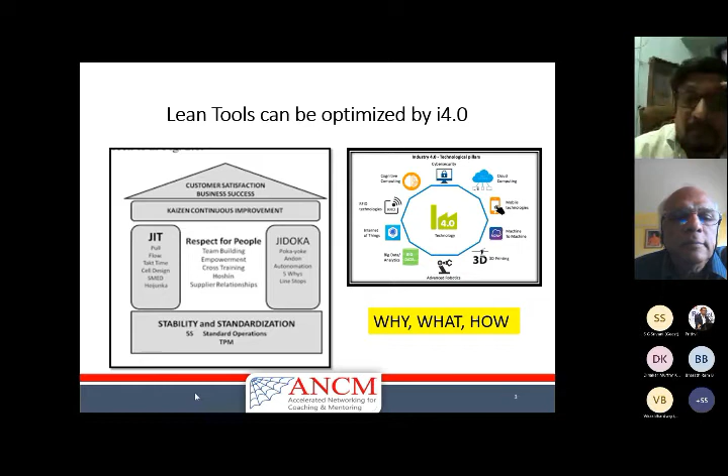Somebody's audio is on. Yes. Rupa, can you send a small request to them? Are you all able to see a screen here? Yes, sir, I think so. Visible, sir. Can you just control that audio of somebody? Their name is SS.

What are the drivers? In 17th, 18th, and 19th centuries, we were migrating from manual, mechanical, electrical to computer-aided manufacturing and automation, and recently internet-driven, data-driven approach. 2 words I'm using consciously: internet-driven, data-driven approach of the 20th, 21st centuries. The primary difference between 3.0 and 4.0 is computer-aided manufacturing, CAM, CAD-CAM, CIM, etc. and robotics and automation existed even during 3.0.

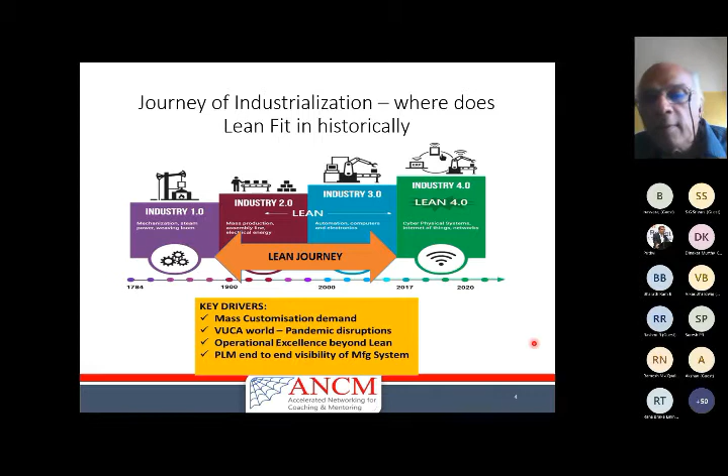Then we all know this volatile, uncertain, complex, ambiguous world. Every speaker on every stage talks about this. But today's talk is how to achieve operational excellence beyond lean. Sir, how is it possible? Some Toyota people are questioning me. Sir, lean is good enough. Just in time is fantastic. Why do we need something beyond lean? We'll come to that point. And with product lifecycle management, PLM, end-to-end visibility is created in the manufacturing system. I know lean also attempts to do that with certain handicaps and difficulties. We'll come to the handicaps of lean.

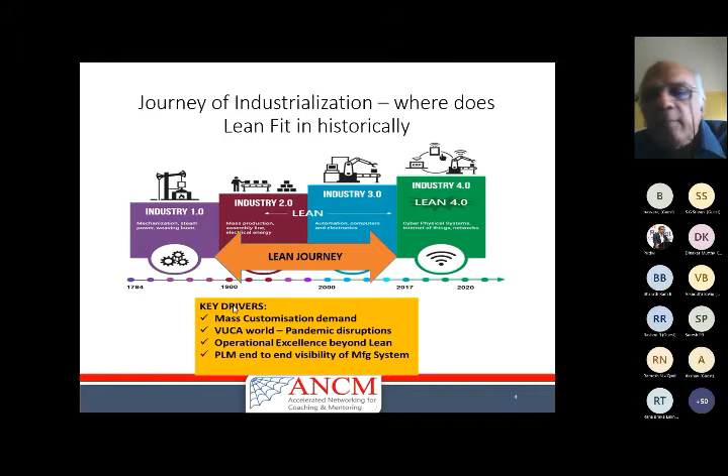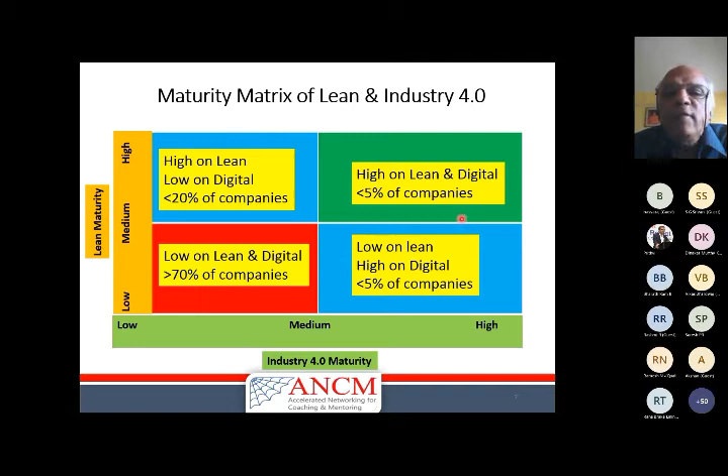Why am I giving all this introduction? To ask you three questions. You all must be wondering what is coming next. Yeah? So far it is a curtain raiser, now it's a teaser. First question. Any of you can type in the text box. Keep typing in the text box. First question: will Industry 4.0 replace lean or will they coexist? I'm not going to give much time, so quickly type it. I'm going to the next question. Question number two: are lean and Industry 4.0 compatible? Do they share any synergies or are they divergent from each other?

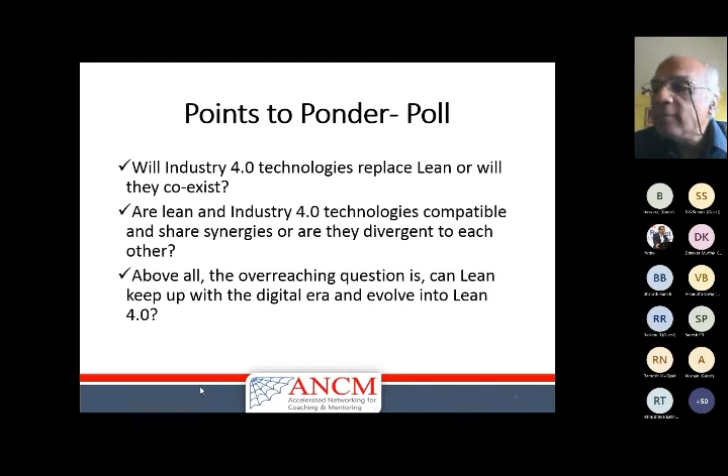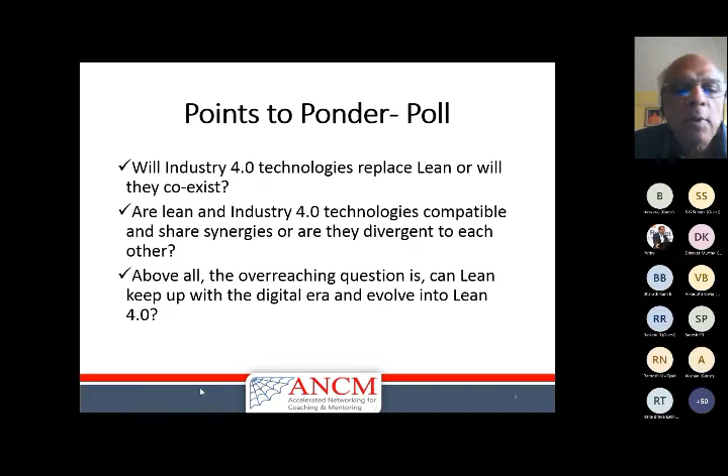Third question. Above all, the overarching question is, can Lean keep up with the digital era? Or is it going to go laid back, and then truly evolve into Lean 4.0? Don't answer it to satisfy me because I am doing the program on Lean 4.0. You be honest and say whatever you feel. Normally, I would have done it as a quiz, but MS Teams does not have a quiz tool.

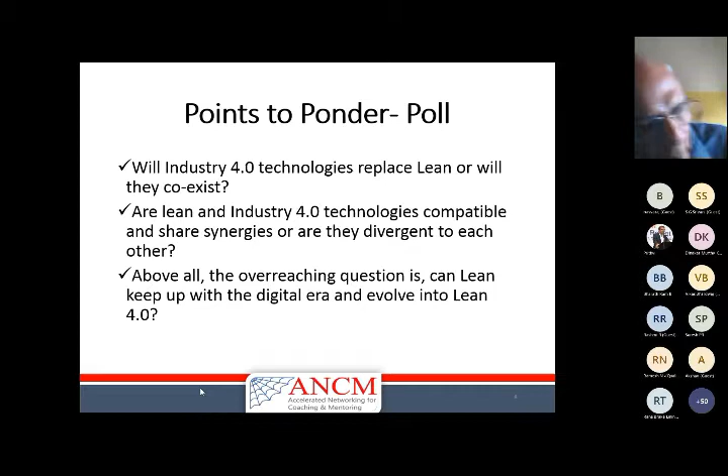Okay, so those are the 3 questions. But I'm going to illustrate to you 3 other questions. One is, how can lean manufacturing, LM, and Industry 4.0, I 4.0, supplement each other at the conceptual level, theoretical concepts. But when you start implementing, can I 4.0 support the lean methods? If it can support, all TPS, VPS, BPS, everybody will be thrilled, because it is going to support the lean methods. And above all, not only support, I 4.0 can help in optimizing the lean methods. The word optimizing is a very, very important jargon. What does it mean? I'll explain in the next slide.

So I'm going to talk about some lean concepts, some Industry 4.0 concepts. You attended several webinars on lean, several webinars on Industry 4.0. I'm only going to give an overview of this because my objective is to combine the two. And then an important point we will touch is limitations of lean. What are the handicaps? What are the shortcomings? How to overcome them through 4.0 and automation. And then we'll arrive at a matrix, the synergy points. The word optimizing, I have not forgotten.

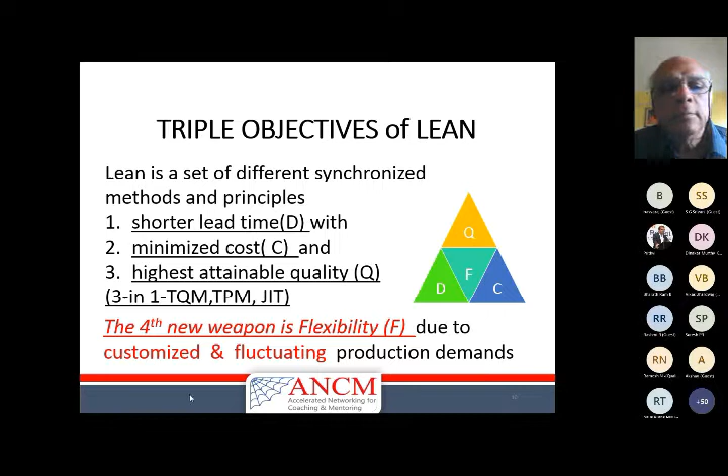And in that context, the capability to manufacture individual and personalized products. When you go to Amazon.com, even the mask which we are wearing, you get hundreds of varieties of mask. Personalized products. The ladies are wearing one mask, one color, matching the saree color. And individual. So how to produce masks? So variant diversity is a very, very important point. Variant diversity.

But Toyota production system looked at two major aspects. Reduce the waste in the value chain. There should be no muda. Muda, mura, muri, of which muda is very important. No waste in the value chain. There can be nothing which is not adding value to the customer.

But maximize customer value through continual improvement. It is not a static picture. Customer value is also a dynamic picture. Today's customer demand, tomorrow customer demand is even higher. Masala dosa, then you want Mysore masala dosa. Then you want Mysore masala dosa made in Dasa Prakash, preferably with a dash of butter on it. So customer demand is also increasing.

So continual improvement is required because customer demand is rising all the time. So customer value focus and elimination of wasteful activity focus. These are the two principles of lean, as you all are aware. And on the other hand, our friend Industry 4.0 is looking at two major aspects. Two. Several people will talk about hundreds of technologies. Just remember two. Human mind can easily remember two.

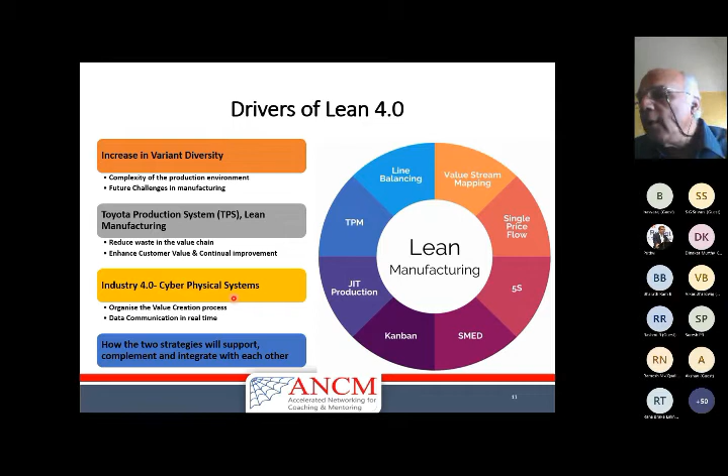Parasunam sir loves KPI, key performance indicator, KRA, key result area. You can measure everything on a real-time basis. When people say real-time, don't get confused. Very simple. Ola car is coming. Where is the car coming? When is it going to arrive? You can watch it through the GPS map every moment. Same with Zomato, Swiggy, Kana.

But in the case of Industry 4.0, it's data communication with a global reach. In real time, global reach. Your supplier can be in Malaysia. Your production can be in Germany. Your final assembly can be in America. You can get this global data communication in real time. Therefore, it can add value to lean manufacturing.

So nobody should say, "Ye sab nahi chahiye, lean is enough." Lean is a foundation. 5S, SMED, Kanban, JIT, TPM, line balancing, value stream mapping, single piece flow. There are many more. It is a foundation. But on that, you need a superstructure called 4.0.

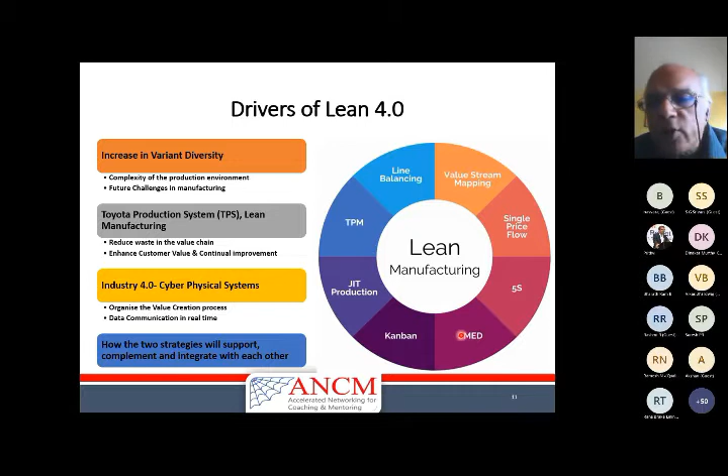Looking in a different manner, already I talked about the JIT and Jidoka pillars, not to repeat, but elimination of any type of waste. Elimination of any type of waste was not possible during lean. While the goal was to reduce the waste, the actual achievement was not possible. One of the brilliant wastes is information waste.

When people say data analytics, data bahut hai, please don't fall prey to that. We don't want data without a purpose. If it is not satisfying quality, delivery, cost and flexibility, forget about data. That is the reason why many startup companies in this country who are digitally very savvy are unable to make a dent in the Indian market, because they are only bringing data analytics and technologies. They are not looking at the benefits of data analytics and technologies, namely quality, delivery, cost and flexibility.

And any type of waste, including information waste: we don't want more data than what is required. Some people say big data, then they scare you. Nothing to worry. Big data has got a very good purpose. I'll come to that point.

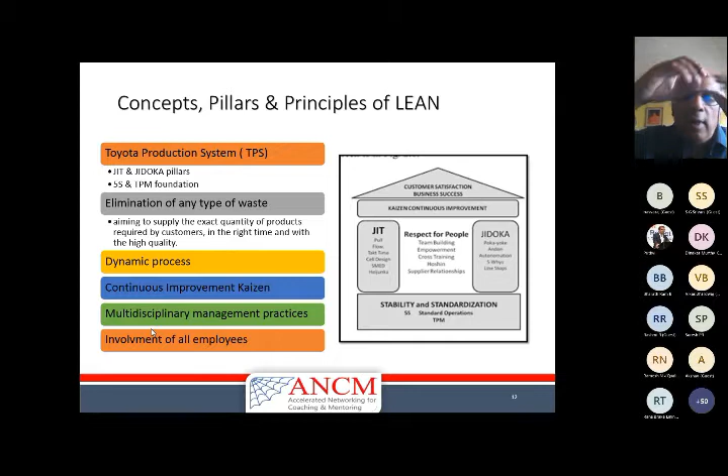So elimination of waste through a dynamic process, continual improvement and multidisciplinary practices. Very important. And involving all employees. These are the common things with both TPS and CPS. Cyber physical systems attempt the same thing, to bring involvement of all the employees. As already mentioned, there is no point in doing digital manufacturing in individual functions or individual levels of the organization. It will not give you the full benefit of Industry 4.0.

A quick summary of the first 7 wastes and how to eliminate them through lean manufacturing techniques. I'm not going to explain all this, you're all very familiar. Cellular manufacturing, setup reduction, SMED concepts, quality control concepts, TPM concepts, production smoothing, Heijunka leveling concepts, Kanban concepts, pull system. Kanban means pull system. WIP reduction, inventory management concepts, supplier development concepts, Jidoka concepts.

Jidoka is alerting the manpower. A very important purpose of Jidoka is alerting the people with information. Computer integrated manufacturing was there even during the lean era. And all of them are attempting to eliminate overproduction, production more than required, transportation, unnecessary movement of products, motion within the workstation, minimize the motion, waiting time, people are waiting, material waiting, product waiting, machine waiting, inventory, unnecessary inventory,

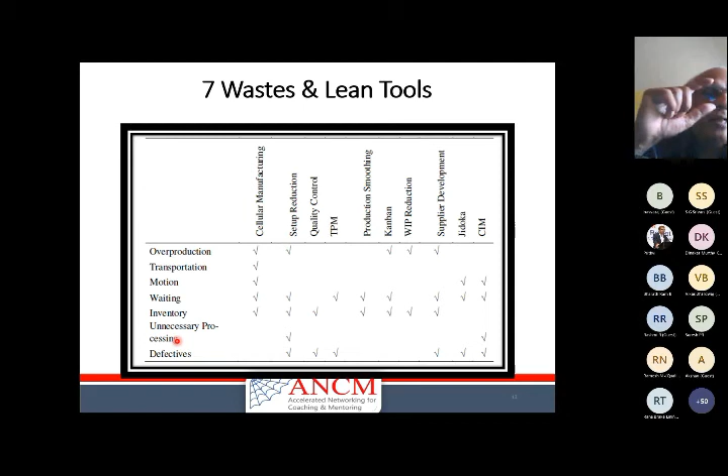stocks are piling up between operations, in the stores, in the warehouse, in the shamiana, in the market, unnecessary processing. People are making calculations of cycle time for 20 seconds, and then it happens to be 30 seconds because there is a 10 seconds additional process. How to eliminate that? Industrial engineers, manufacturing engineers, cutting tool engineers are studying. Defectives, very famous problem, quality problems. All these are eliminated through several technologies. You can see each technology is addressing some of the waste. Cellular manufacturing addressing these, like that.

There's a big thesis on this. If possible, I'll try to share. But 22 years later, again the same thing was analyzed and presented by Womack and Jones.

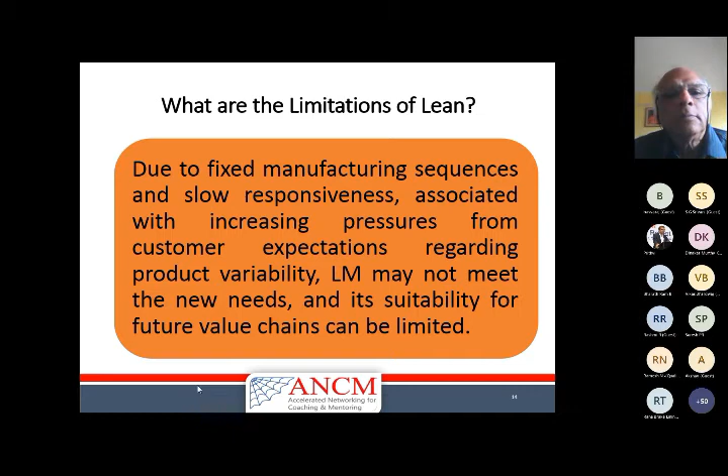What are the various technologies? Having talked about lean, a little glimpse of Industry 4.0. Automated production, predictive maintenance, connected machines, 3D printing, big data analytics, smart transport system, network supply chain, production simulation. Automated production, you are very familiar: automated conveyors, robots, cobots, etc. Predictive maintenance: continuous machine monitoring, condition monitoring, and predicting when it is going to fail much before it fails.

Connected machines. Machines are no more individual machines. All machines can talk to each other, and all machines can be managed through a central agency, not through a SCADA system, but through internet-enabled cloud-based systems. Additive manufacturing is not just a technology, it is also a digitally enabled technology because you can send a program through the internet and manufacture the part anywhere in the world. The design can be in India, production can be even in Africa.

Big data analytics, very useful for machine learning algorithms, ML. When you do artificial intelligence and machine learning algorithms, taking multiple variables, dependent and independent variables, coming from multiple sources, and analyzing them to see a pattern is very, very important. You can't do it with ordinary computers. So you need big data, either server based or in the cloud. And smart transport system.

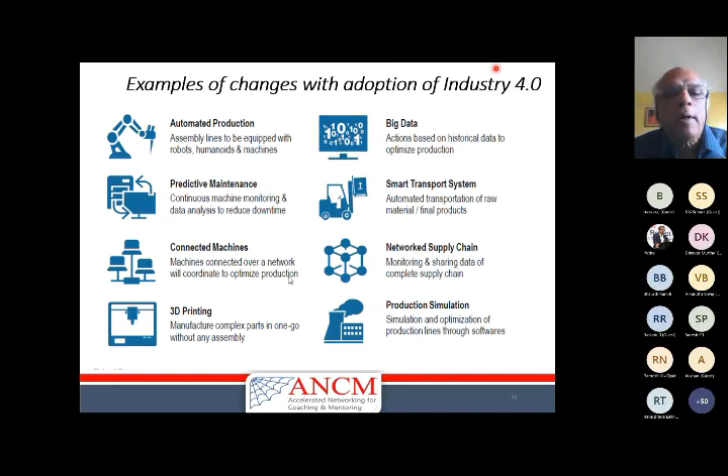And above all, simulation. Without even producing one part, you can simulate every process through PLM technology. These are all put together under the banner of Industry 4.0 and many more. But don't get confused with several technologies and buzzwords. Just remember two things: Internet of Things, cyber physical systems.

The backbone of Industry 4.0, which allows worldwide data communication in real time. 10 milliseconds. My co-chairman Jagannath says 10 milliseconds. The data is coming and you can analyze in 20 milliseconds. Connect several devices to the cloud. Cloud is nothing but internet.

And cyber physical system, it holds a potential to reshape our world with more responsive, precise, reliable, efficient systems through smart devices, sensors, systems, etc. And they are now replacing existing legacy equipment. The other day, I conducted a program on smart machine tools. We will do one day for BCIC.

Smart devices are coming up in smart manufacturing, smart city, smart hospitals, smart hotels, and above all, smart grids for electrical generation distribution. I don't want to get into the depth of the cyber physical system, but suffice to say, the physical world of robotics combined with advanced algorithms like machine learning creates self-learning robots. Is an example. Physical robotics, Industry 3.0, advanced algorithm machine learning, Industry 4.0, together give you self-learning robots.

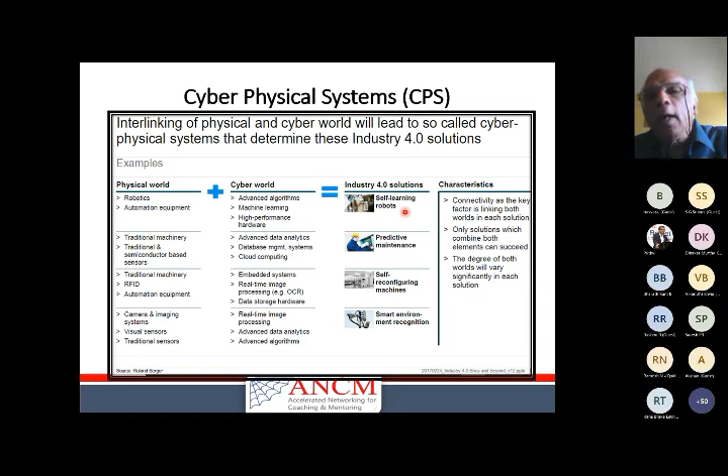You don't need to create a program for the robots. You make an initial program, thereafter it modifies its own program. Self-learning autonomous robots. Self-configuring, self-optimizing machines are not in the future. It is already there in our Ola and Uber concepts. And so, coming to the crux of our presentation today is what are the three levels of integration.

First level of integration is lean is a prerequisite, it's a foundation. Please understand, I love lean. I love JIT. In 1987, I attended a global training program on JIT in Harare, Sheraton. Beautiful hotel. And in the afternoon, we go and see the animals. From that time, in several industries, I had the fortune of implementing JIT. Not only the automobile industry. So it is a foundation and a prerequisite, and it is also the enabler.

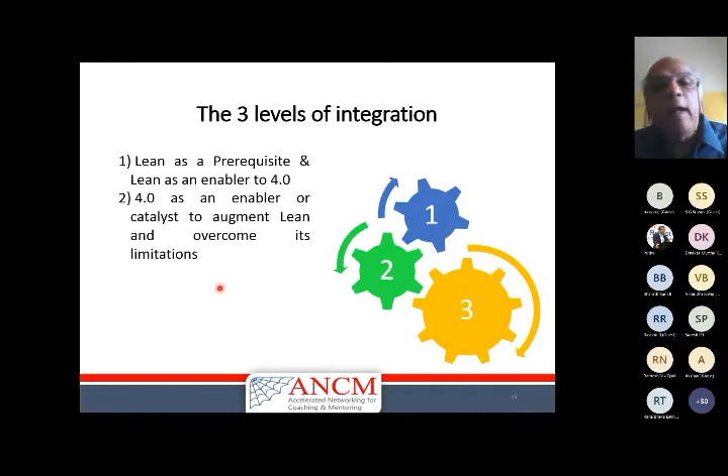How it is an enabler, I'll explain. And similarly, 4.0 is an enabler and a catalyst. If somebody has not done lean so far, no problem. This 4.0 will motivate you to do the lean. But you better do the lean, then do the 4.0.

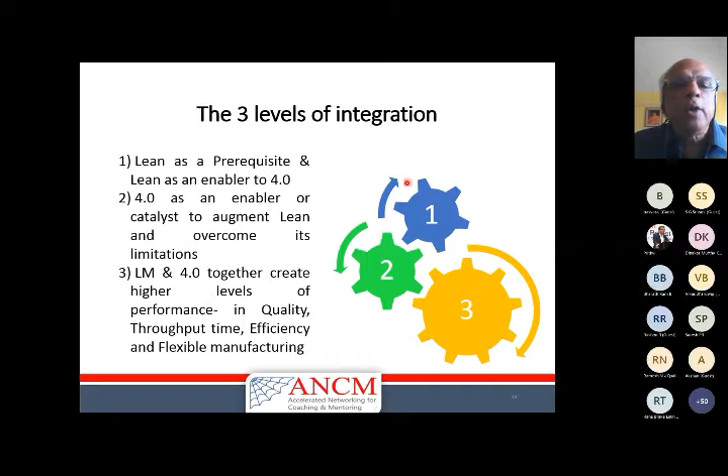And finally, together they create very high levels of quality, throughput time, efficiency, and flexible manufacturing. Throughput time alludes to delivery, efficiency alludes to cost: quality, delivery, cost, flexible manufacturing. All the three gears, 1, 2, 3, together make the integration. Explaining the 3 points. Standardized, transparent, and reproducible processes are the foundation of lean. And that enables you to bring in 4.0.

Our data-driven analytical people would love to have standardized, transparent, and reproducible processes. Data analytics. And the decision makers, the people who understand lean, will automatically understand the value creation and elimination of waste by the 4.0 people. Otherwise, what happens? The 4.0 remain only technology leaders. They will confuse you with concepts like blockchain, artificial intelligence. You think they have arrived from heaven to tell you some technology words. Don't get confused by those people.

Ask them, "To kya hota hai? What is the benefit?" Only the lean people will understand the benefit and the value to the customer, to avoid the waste and enhance the customer value.

And above all, by reducing the product and process complexity, lean enables optimal use, because 4.0 is expensive. If you brought the company to a certain level through lean, you can invest very small amounts and get very high benefit through 4.0. Otherwise, if you start from scratch, your investment in 4.0 is very high.

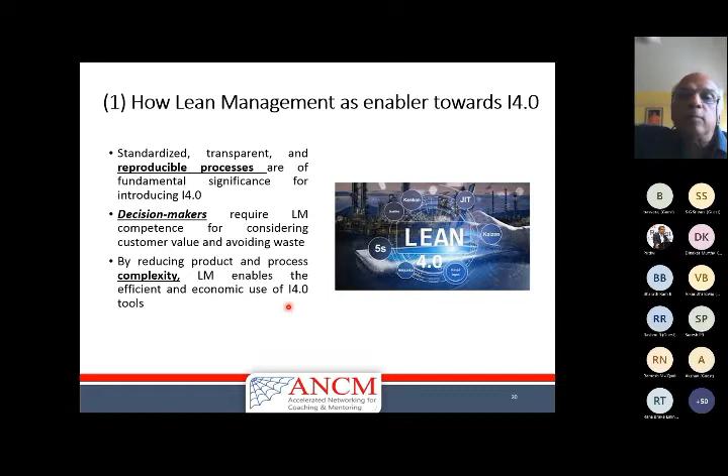And conversely, Industry 4.0 helps you to implement lean. How? A key point is flexibility, flexibility, flexibility. The other day I went to Siemens Kalwa, Mumbai. 150 varieties of switchgear are produced in one line. The line is supplied by Titan Automation, a Tata company, and 150 switchgears are produced.

Earlier method, one line per switchgear. For 50 years they were producing like that, 5 decades. Now one single line produces all the 150 switchgears as per the demand of the customer. And the demand also will vary, it will fluctuate. The takt time of any one switchgear is different from another switchgear.

And they implemented Industry 4.0 with the help of Titan Automation and the Siemens own software division, and they came up with the Siemens Kalwa Digital Factory. I visited that 3 years back. It's a true example of how flexibility and variety is managed in spite of the complexity through cyber physical systems. Every component is carrying an RFID in that factory.

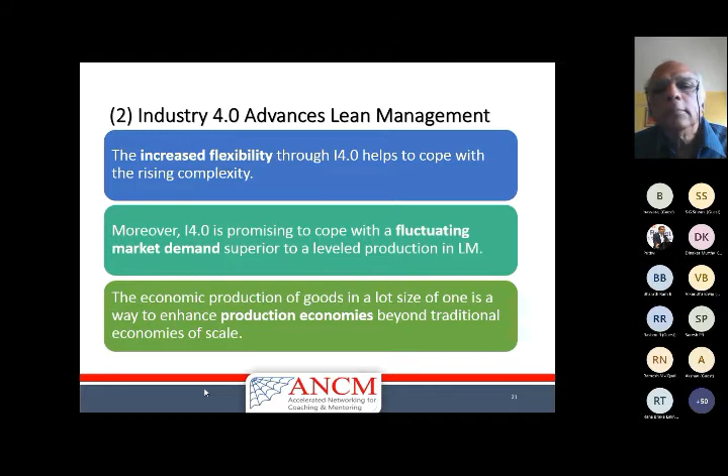I'm not going to explain line by line. That's a master class, it will come later. I'm giving a flavor today. It's already nearing 12 o'clock.

And because of that, whether I'm using automation technology or decentralized production, employee oriented, resource efficiency, and everybody looks at multiple tasks, these are all the main points of lean manufacturing. Even Taiichi Ohno said autonomation. Autonomation is nothing but low cost automation, and automation which will help the operator doing on his own without a supervisor. So to that extent, even 20 years back, there was automation in the lean concept.

But very, very important, which was enhanced by 4.0, is empowering the workers. Like lean empowered through Kaizen philosophy and 5S philosophy, 4.0 is empowered by tablet philosophy. When I say tablet philosophy, I mean everybody has got an iPad or tablet, and you can monitor your own production, your own quality, your own takt time, your own lead time, cycle time, without anybody else telling you from a supervisory level.

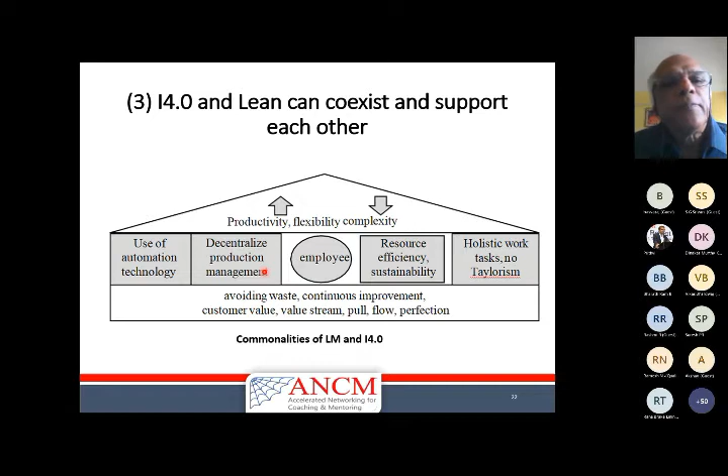So decentralized production management, Monday morning meeting, sunrise meeting, daily work management, all these are replaced. You are going to see this even in the famous companies who are following these things. And then come back to Boston Consulting Group. Those who implemented lean through several concepts could get a 15% cost reduction maximum. The cost reduction also includes cost of quality. But those who implemented 4.0 with no concern for lean could get 5 to 10% cost reduction, mostly through productivity improvement.

But those companies in the Boston Consulting report I showed you earlier, 750 companies who did both lean and Industry 4.0 jointly, got up to 40% cost reduction. 40% cost reduction. They showed it with evidence to Boston Consulting Group through several technologies. I'm not getting into the technologies, but the synergy of both together is much more than any one individual.

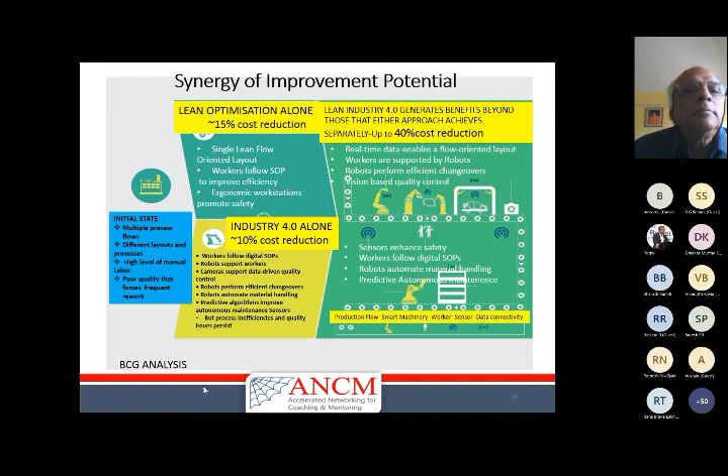That much is my module 1. 12 o'clock now. I finished my module 1, which is nothing but why we should combine the two. So far, we are only looking at why we are combining the two.

I will continue, but any of you who want to go for a health break, coffee break, etc., I can give a 5-minute gap. Rupa, in my watch, we will come back within 5 minutes.

The second module is more important than the first module because the second module is going to talk about how and what to implement in Lean 4.0. I will continue, but if some of you want to go and come back, I have no problem. The deeper analysis is now starting. I can't illustrate all of them.

Just-in-time 4.0, Jidoka 4.0, Kanban 4.0, SMED 4.0, 5S 4.0, Poka-yoke 4.0, VSM 4.0, Value Stream Mapping, Kaizen 4.0, Visual Management, Virtual Simulation 4.0, TPM 4.0. I will attempt to take up one or two of these in the coming slides.

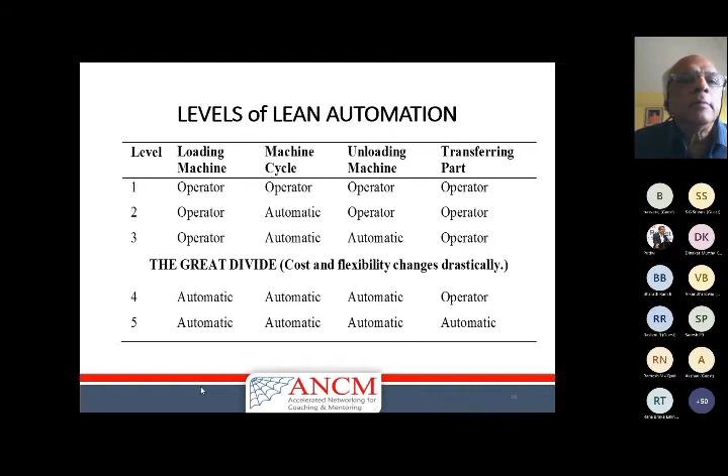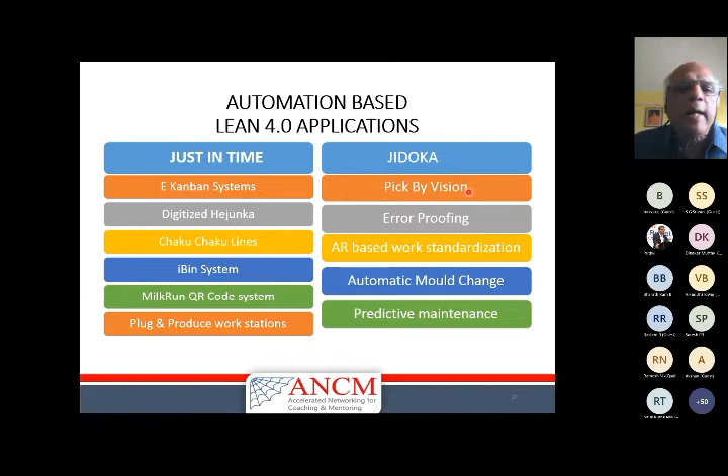Jidoka: pick by vision, error proofing, augmented reality based standardization or training, automatic mold change, could be here or could be here also, predictive maintenance. These are all people driven, enabling people, alerting them, automating some people operations, mistake proofing, Poka-yoke. I put them under Jidoka. I stand corrected. Some of them could belong to both. Some explanation of each one of them. Let us take one by one.

E-Kanban systems. All of you are familiar with Kanban systems, at least those who implemented lean and just-in-time. But now a revolution is happening across the country, across the world. The digitization of the Kanban system is known already for several years. The conventional physical Kanban card is used for order-oriented production control. It is not stock-oriented, it is order-oriented, which means pull system. Customer order will pull everything else.

What is the difference there? E-Kanban looks at converting the Kanban card to a digitalized Kanban card. But in virtual Kanban, you don't need that also. Everything can be looked at through the tablet in the hands of the operator. If you go to Doddaballapur, you can already see that going on in Bangalore. I went there 4-5 years back with a CII group and a BCIC group.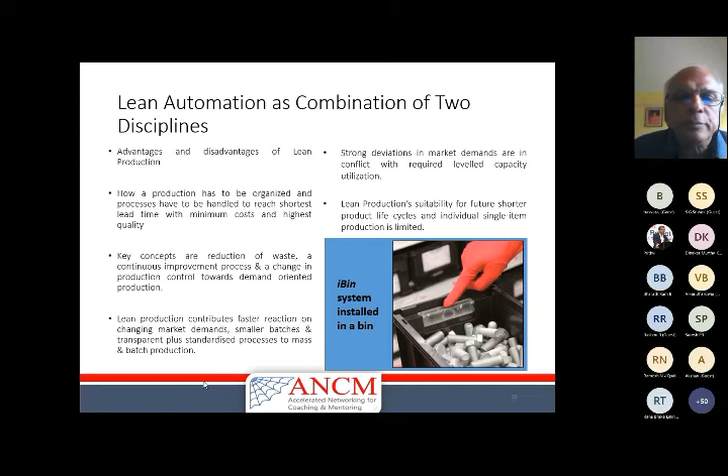And to summarize, when I combine the two, you get a smart operator, you get a smart product, you get a smart machine, and you get a smart planning system. Smart factory is nothing but the combination of operator, product, machine, and planning. Man, machine, material, methods. Man is operator, machine is machine, material is product, method is planning.

The forums under just-in-time through Kanban system and under Jidoka through andon system. Andon system I will explain shortly. The smart products, they know the production process. The product itself has got built-in information. I saw in Siemens Kalwa, every component has got its assembly sequence built in the QR code, and they negotiate with smart machines. Negotiate.

In Chandigarh, I implemented a line in 2012. At that time, we didn't know about Industry 4.0, where one line can do 2-cylinder engine, 3-cylinder engine, 4-cylinder engine for Mahindra Swaraj. The product can negotiate with the machine through the Renishaw probe. And today we can have a digitalized IoT system which will ensure Poka-yoke.

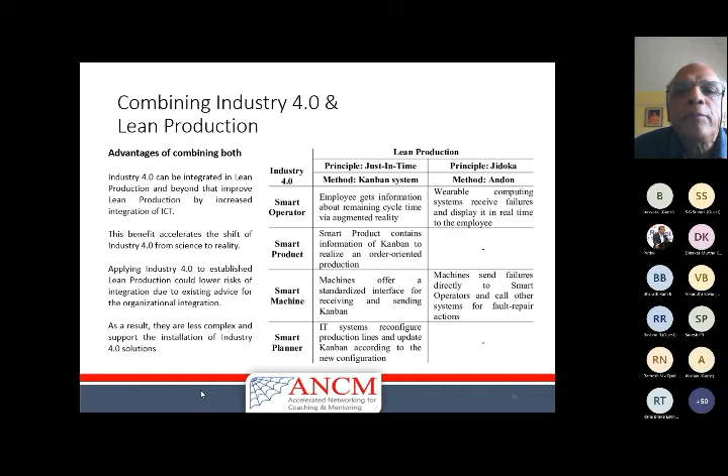So in other words, smart operator through andon method, smart watches. I forgot to mention smart watches, Fitbit watch, and they trigger the actions. They are not only receiving information, they can also trigger the action. Smart product, smart machine, smart planning. And this is a plug and play system. The study was done in a German laboratory.

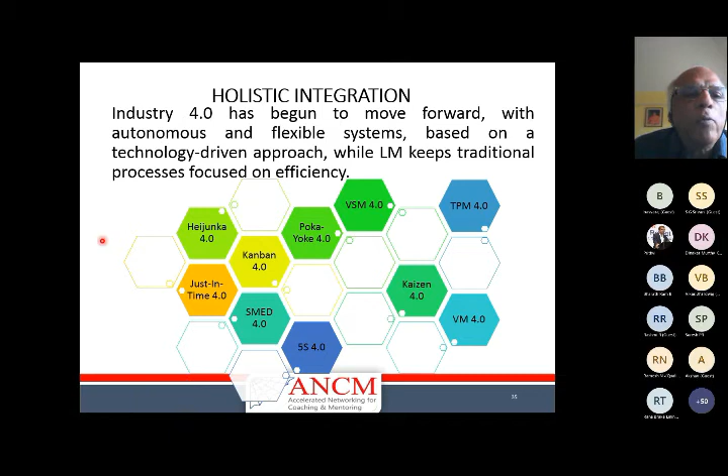And therefore, the holistic integration will result in all these things. Look at this concept. Read it carefully. These are the lean manufacturing tools. These are the Industry 4.0 technologies. There is a research paper which explains this, which I'll share with you later on through BCIC.

Big data analytics enables just-in-time, it enables Kanban, it enables value stream mapping, it enables Kaizen. It also enables TPM. There is a color problem. This is one way of reading. Another way of reading, TPM is enabled by big data analytics, automated guided vehicles, AMR, additive manufacturing, cloud computing, visual simulation, virtual simulation, and augmented reality.

You can read this chart in two ways. Which lean manufacturing tool is supported by which technology? Which technology supports which lean manufacturing tools? And gentlemen and ladies, this study has shown there are 68 potential points of contribution and definitely 25 synergy points. Sorry for the color, but they are all there.

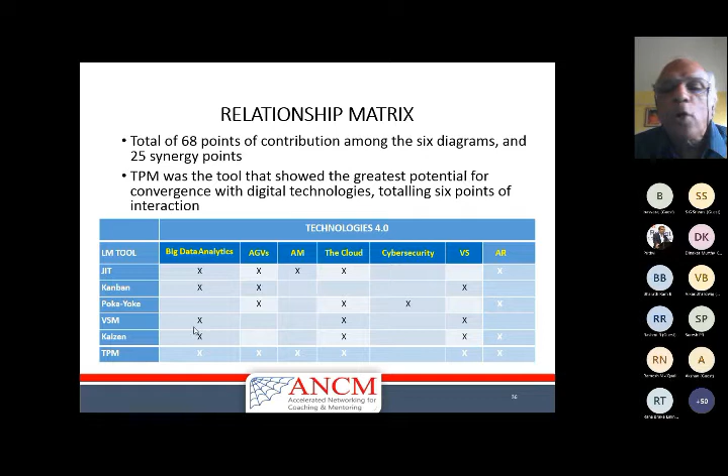And TPM, surprisingly, showed the maximum benefit from the Industry 4.0 technologies. So therefore, in the available time, I will focus on TPM. But to understand the benefits, we have to measure through 5 items. These are the criteria of measurement. First and foremost criteria, integration among processes, among devices, and among the users. Users means stakeholders.

The worker is very, very important in this. It is not only the manager. Our manager can see the data sitting in his room. No. Can the worker see his data himself? That is a true maturity achievement of Industry 4.0. The devices, the machines, the RFID and mobile phone, all devices, the processes, manufacturing processes. If you can integrate all of them, we give a thumbs up.

And eliminate waste. If this is true, thumbs up to the technology. Can we create flexibility in the entire supply chain? Not only the OEM, but tier 1, tier 2, tier 3, dealer, everywhere. Then we give thumbs up to the technology.

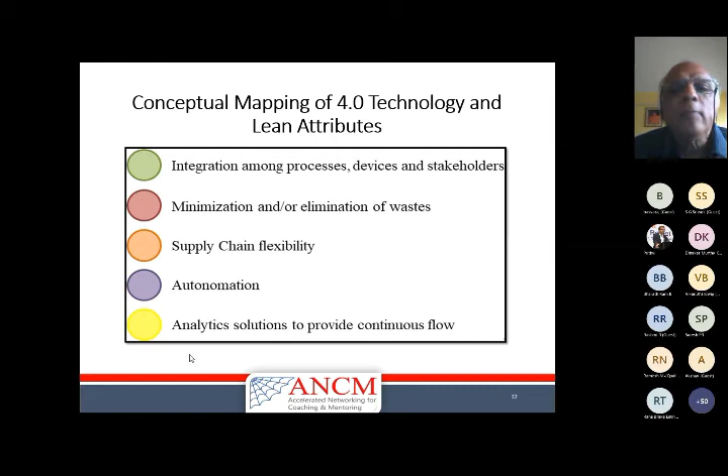What is value stream mapping? I will bring Mr. Natarajan, my friend, who is an expert in value stream mapping, to conduct a class for BCIC. He sits in Chennai, so you'll do it online. He worked in TVS Group and Rane Group.

Okay, I said I will concentrate on TPM, but I will also touch upon just in time. Just in time is the core of lean, and TPM is a very important subset of lean. It was independent, but then it became part of lean. Produce and procure what is required when it is required, with zero inventory, zero buffer. Pull through production in the entire value chain to customer demand, takt time.

Customer rate of demand is equal to rate of production, takt time. You all know the word takt time, I think. T-A-K-T, takt time, pull through production. And small lot production, single piece flow. It could be as low as 1, which will result in zero inventory between the processes.

And finally, direct online delivery. Toyota Corporation is already doing it in Bangalore. Direct online delivery. Mr. Ravichandran of Lucas TVS conducted a workshop 30 years back. I attended in Chennai on behalf of CII.

He said how the tires from the tire manufacturer will be delivered to the assembly line of Toyota, on the station where the tire is assembled. From the lorry to the assembly line, the tire is jumping and assembled. 1980s I'm talking. Mr. Ravichandran is like an evangelist of lean manufacturing, just in time. He was Lucas TVS vice president. He went to Toyota in Japan, came back and gave this talk.

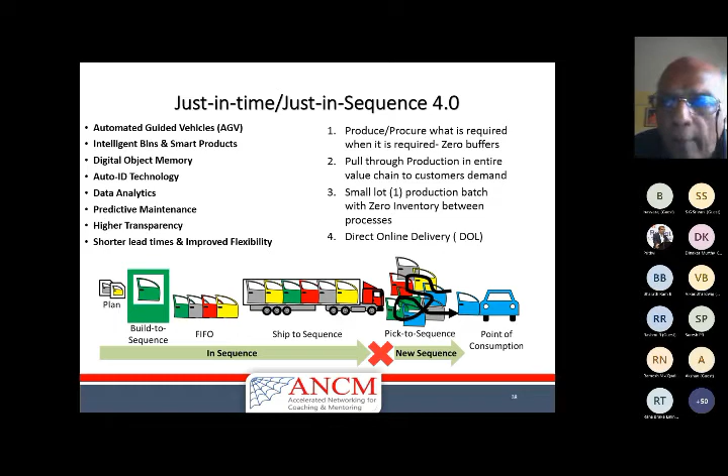Okay. The automated selection of the RFID tags. Even the tag you don't have to put. The selection of the tag also can be done automatically, and therefore it is a true high level of automation, which is required in fast moving consumer goods like Hindustan Lever, in pharmaceutical industry, healthcare industry, Amazon.com. For these kind of requirements, you require the stock monitoring, and further improvement of automation is done by automatic picking up the tags by the RFID.

And the replenishment process from the suppliers. Already I talked about iBin. It is again enabled by the RFID. Information about which supplier has got ready stock, the stock in the supplier place, is read by this internet enabled system through the cloud. You can't do a Wi-Fi to the supplier. Therefore, you need the internet. JIT and JIS 4.0, just in time and just in sequence, both therefore require big data and data analytics systems.

The opportunity to analyze detailed real-time process information. So many parameters are changing. The future factory, it has been predicted, where already Fanuc has proved there is no human being in the Fanuc factory in Japan. For the people, by the people, of the people is democracy. By the robo, of the robo, for the robo is Fanuc. It's a new democracy. And predictive maintenance through data analytics.

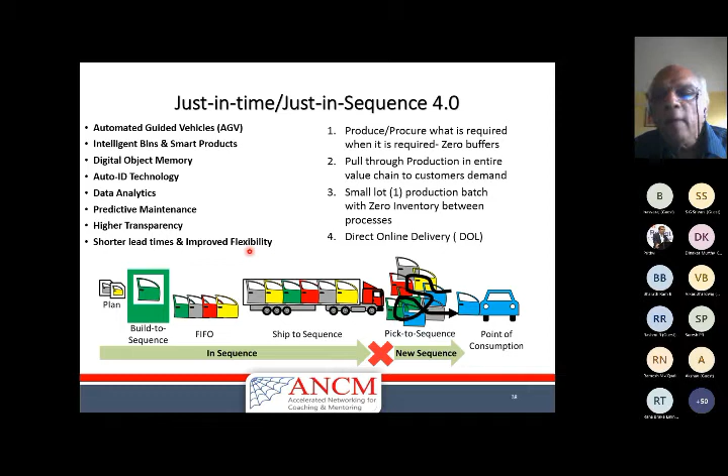Taiichi Ohno said the one and only goal of just-in-time is reduction of the lead time and managing the flexibility. And with all this, one research paper came out. I'm not getting into the detail. It's already 12:45. Just-in-time 4.0 can use augmented reality, big data analytics, autonomous mobile robots, cloud computing, additive manufacturing. And with all this, it can achieve the various benefits which are mentioned around this.

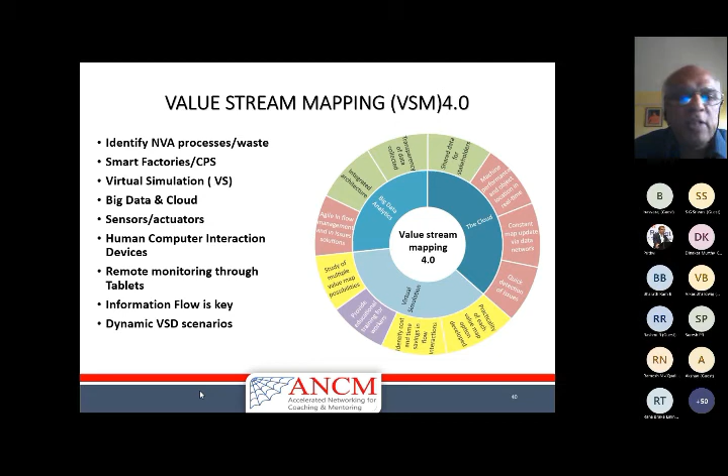I just explained to you some of the benefits. I will share this research paper with you also. Very useful. How everything is just-in-time 4.0. In the next module, I realize 40 slides for 1.5 hours is a good rhythm. Value stream mapping 4.0, next class. Virtual simulation 4.0, next class. Digital twin 4.0, next class.

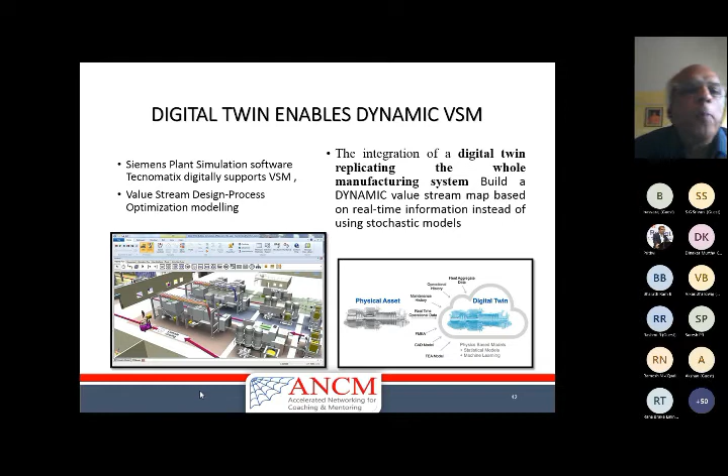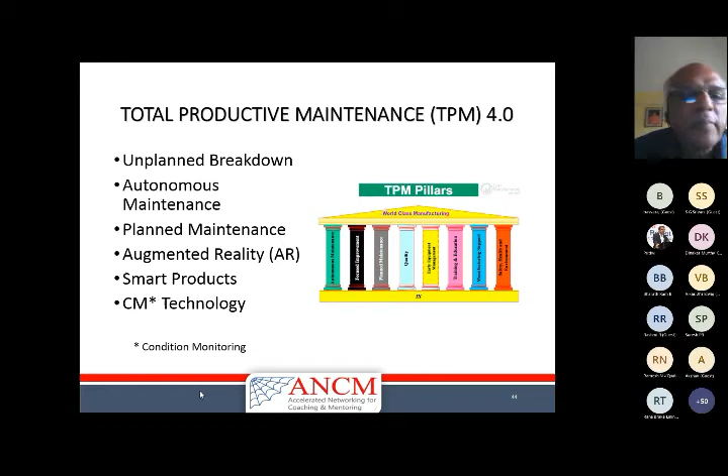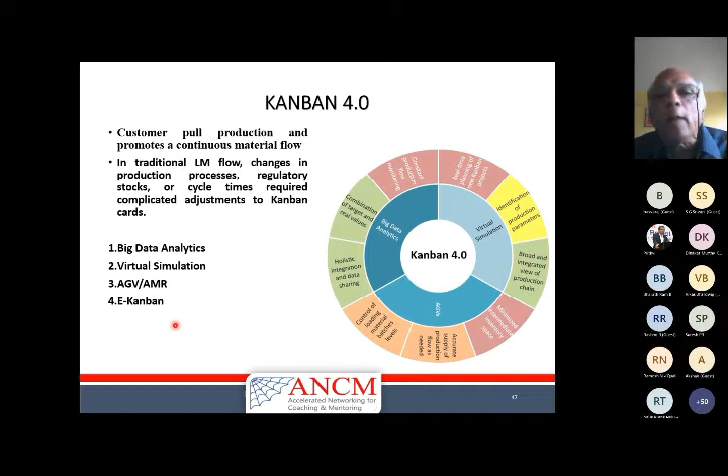Value stream mapping, a special case study done by an Italian company. Total productive maintenance, TPM 4.0, next class. Kanban 4.0, already touched upon a little bit in the context of just-in-time, how it can be used with big data analytics, virtual simulation, AGV, AMR, e-Kanban. Heijunka 4.0. We will do this after Prakash does the class on Heijunka.

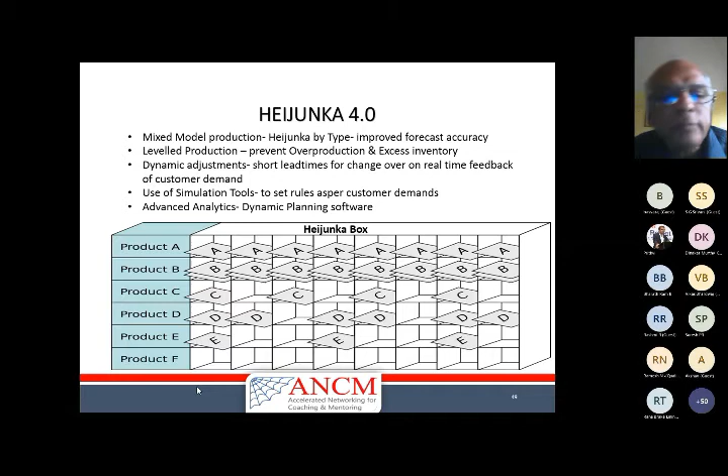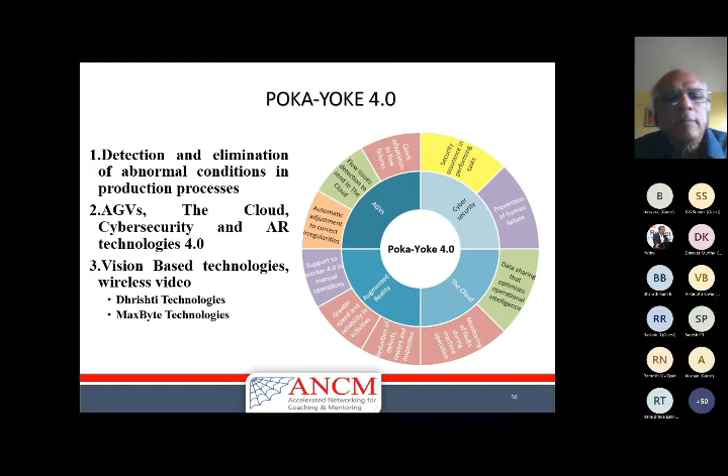Poka-yoke 4.0. I already gave you several examples of Poka-yoke 4.0. And vision-based technologies by Dhrishti, MaxByte kind of people, through video-based analysis, are catching up very fast. Poka-yoke 4.0 in very many applications. Above all, Kaizen 4.0, can you believe? MaxByte has introduced Kaizen 4.0 and root cause analysis 4.0, by digitalizing Kaizen, by digitalizing root cause analysis, the fishbone diagram.

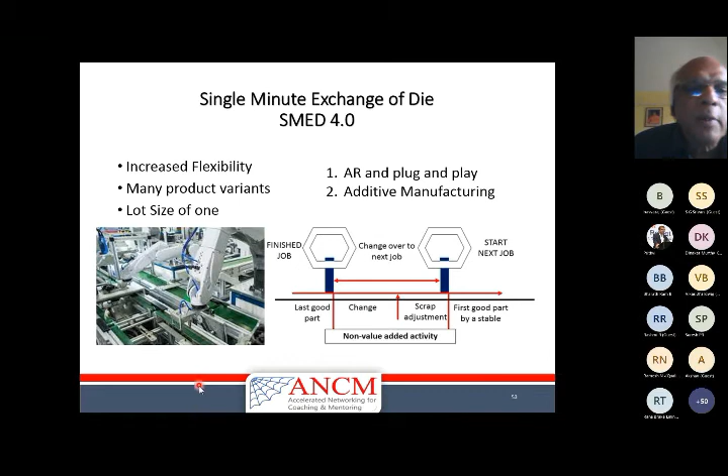I'm not saying it to promote MaxByte. I'm saying it because of our startup companies in India under NASSCOM. Mr. Sushil Mittal is promoting several startup companies across India to bring in these small apps. C4I4, Pune. Single minute exchange of die 4.0.

Human computer interaction. Go to TAFE Doddaballapur. Mr. Palaniappan has done it since 2012. Hats off to that gentleman. I request our president to invite Mr. Palaniappan.

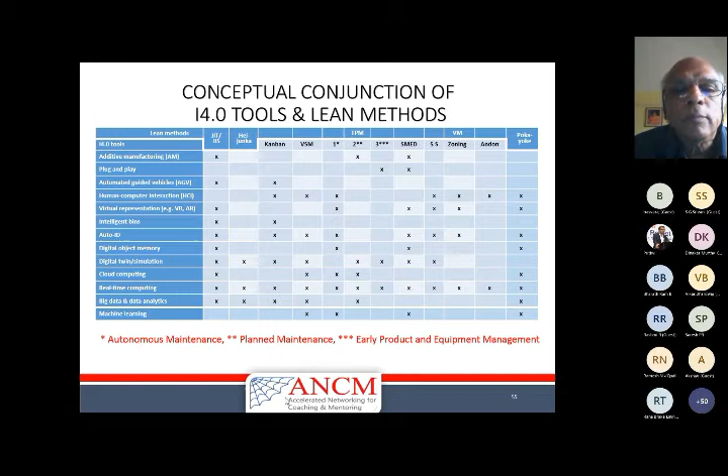These technologies are eliminating several wastes. Earlier I showed you how lean is eliminating waste. Now I am showing how 4.0 is eliminating the waste. The same 7 wastes. Of course, Parasuram will say there are 16 wastes. I agree.

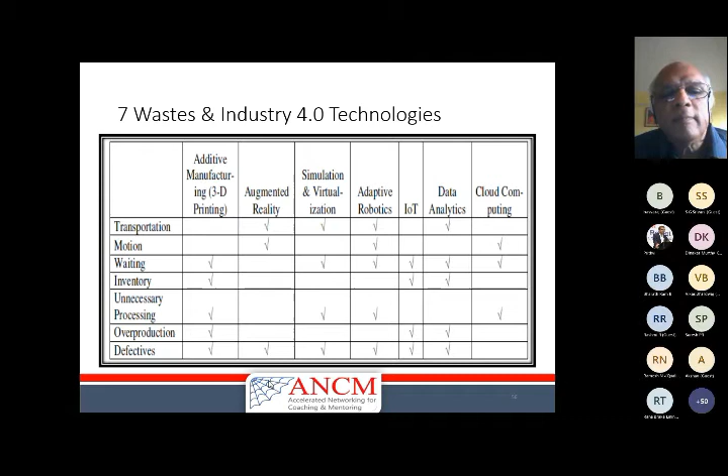We'll take this up in class 2: how there is a roadmap to implement these technologies. The roadmap. Which are the technologies to start gradually one by one? Which are the concepts in lean gradually one by one?

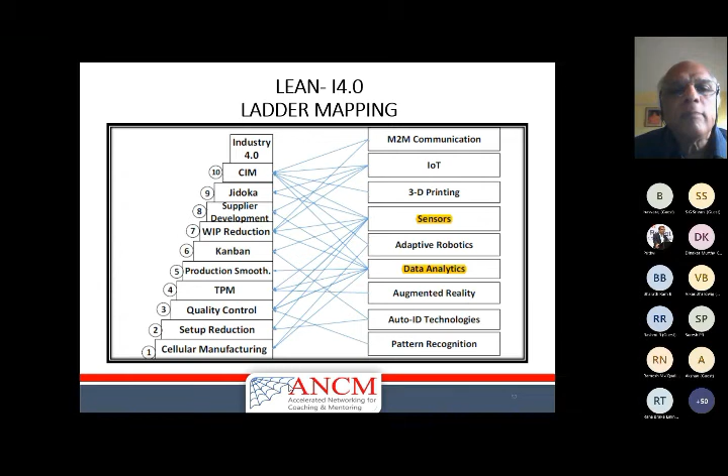In other words, ladies and gentlemen, and my dear good friends, the summary, the benefits and the conclusions. Lean manufacturing and Industry 4.0, they are not mutually exclusive. They can seamlessly be integrated with each other for successful production management.

And Industry 4.0 cannot solve all the problems of mismanagement and weak organization of manufacturing systems. You must do the lean activities first before you can do automation. Even Bill Gates of Microsoft said, do not automate an inefficient process in the IT industry. It will only increase the amount of inefficiency.

In addition, effective information flow should be maintained before introducing information communication technologies. First of all, there should be information. Then only you can introduce technology. What cannot be monitored cannot be measured. What cannot be measured cannot be recorded. What cannot be recorded cannot be monitored. What cannot be monitored cannot be improved. Who said? Juran said it.

In this context, keeping the data in the right and current manner, meaning it should be updated. Yesterday Ola booked, today car is coming. No use. Is it current data, live data?

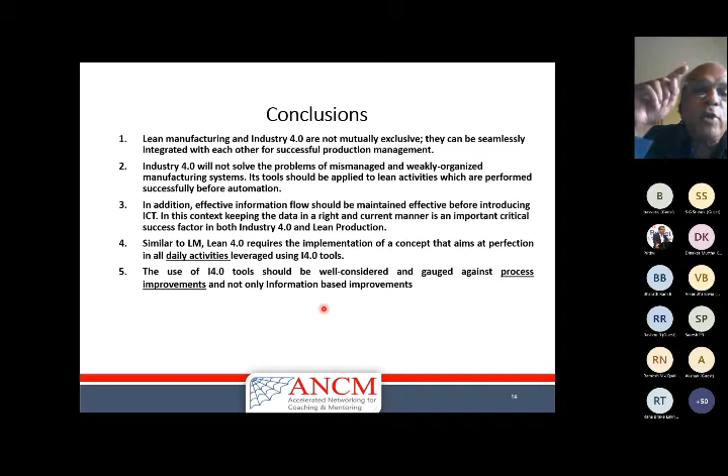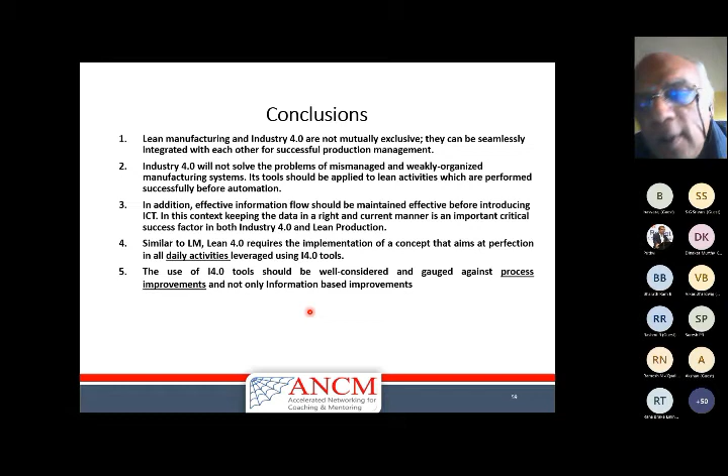And similar to lean manufacturing, Lean 4.0 also requires a very good level of daily activities. Dr. Devarajan says daily activity management is very, very important. I totally agree with him. But at the same time, with 4.0, we should not only look for information-based improvements, but also process improvements. If you have a very bad machine, very bad cutting tool, very bad fixture, Industry 4.0 cannot improve it.

And the limitations of lean manufacturing: because of the very high mix of products, very high fluctuation of demand, very high fluctuation of supply and very high variety, lean manufacturing requires some more technology support. That is why 4.0 is coming.

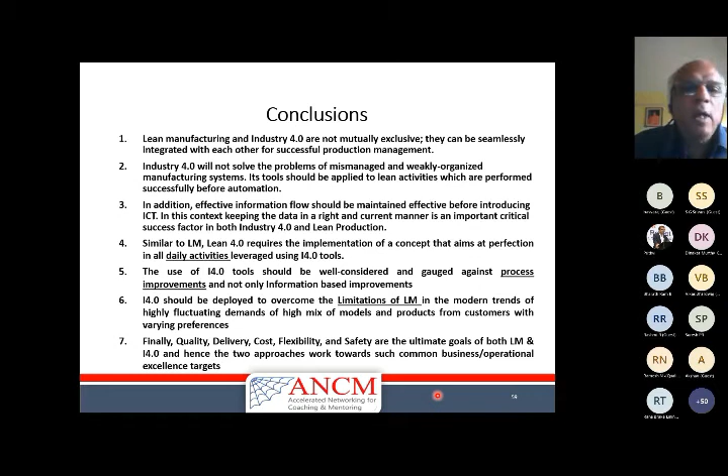And last but not the least, my good friends, quality, delivery, cost, flexibility, and safety, I forgot to mention safety, are the ultimate goals of both lean and 4.0. Therefore, I submit today that operational excellence and business excellence require lean 4.0.

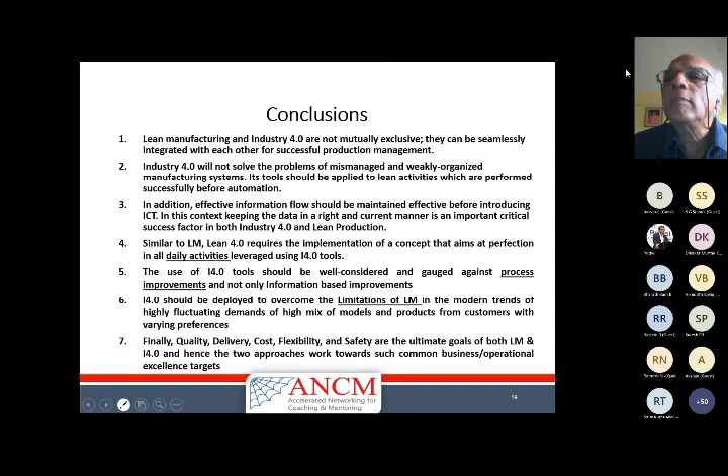Uma? Yes, sir. So would you like to have the question and answer session now, sir? That's right. I have unmuted the participants. They can ask the questions. So Mr. Ramanathan has raised his hand. Mr. Ramanathan? I hope my slide has stopped. Go ahead, sir. There are around 60 people. Anything typed in the text box, you can read out to Uma. Mr. Ramanathan, go ahead.